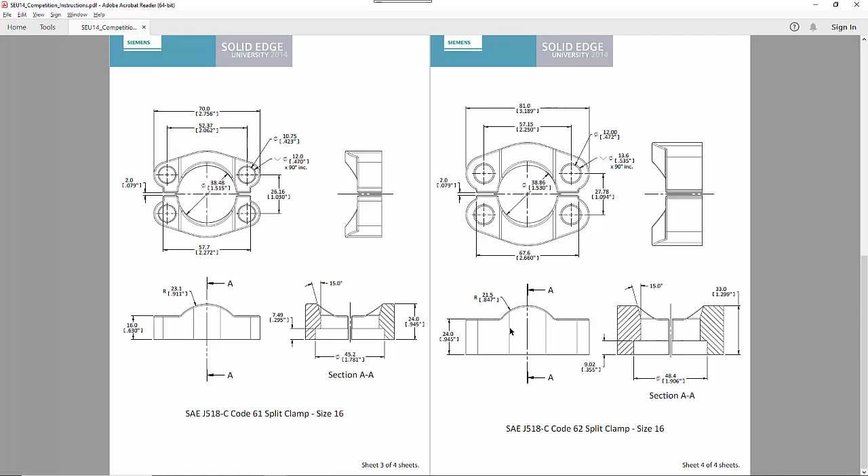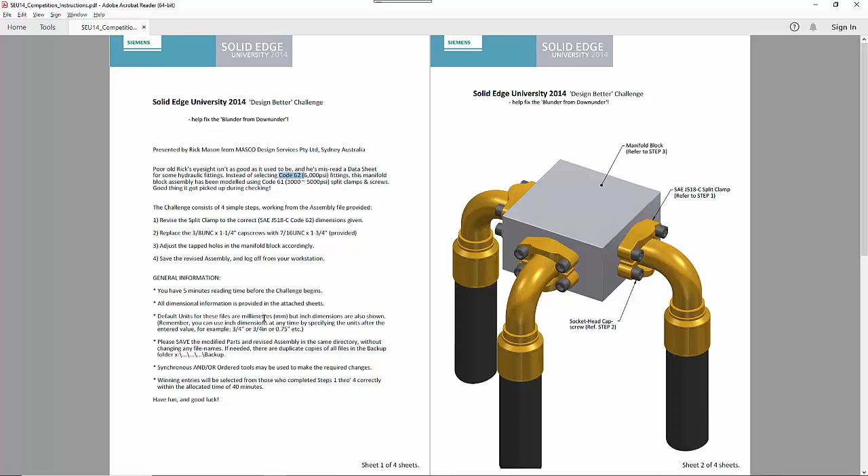So we can use either ordered or synchronous, but we'll need to work through and work out what is the best option. The assembly is made up of a number of components. We need to modify the manifold block and the split flange, and then replace the cap screws. So we'll start by going into the split flange. We'll do this from the assembly.

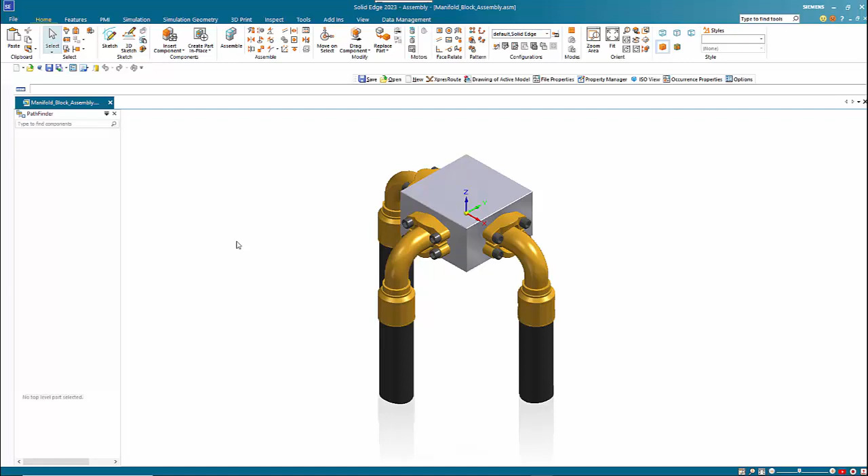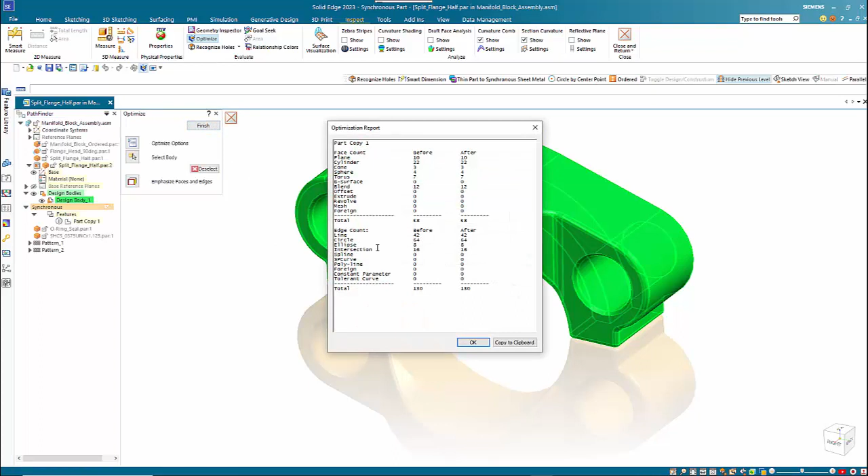I'm going to use Control Q to hide the rest of the assembly, and we'll see that we've got a part copy in here. So this is an imported model, most likely, but it's got a warning on here, so we'll go to Inspect and hit Optimize just to clean up and make sure that there's no duplicate information.

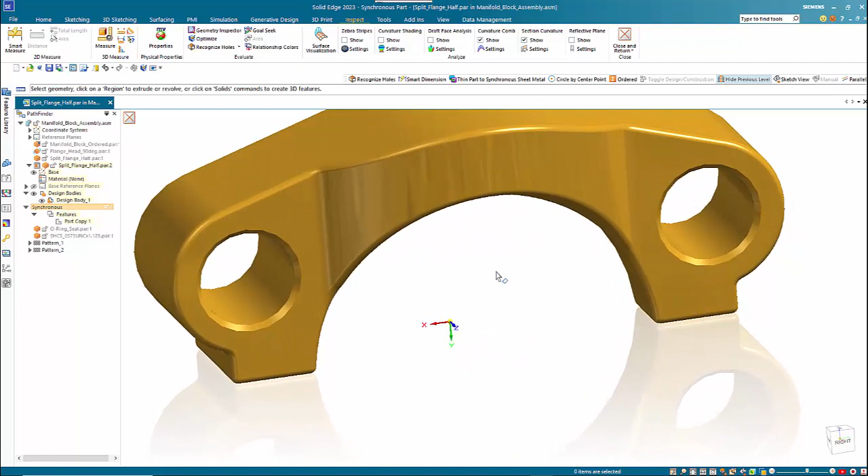Another thing that I can see from here is that we've got some complex areas coming in here, and these rounds are just going to cause problems. If I was modeling from scratch, I would put these on the ordered side of the modeling. So to start off with, I'm going to remove them. Shift and Space takes me into the selection manager, and then I can go equal radius and it'll pick up all of those at the same time. Hit the space bar to come out of that, and then I can just hit the delete key.

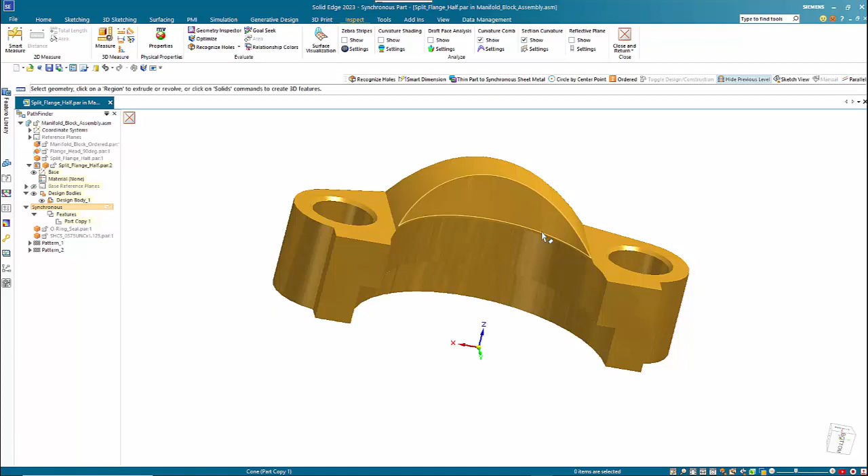And we've also got a couple of 2mm rounds on here and one in here. So just because of where it sits, I'm just going to remove those. I've also got a hole in here, so let's just go back and do a hole recognition. Fix it up, okay. I'll come back and change that later. So now let's look at some of the dimensions on this model, because I'll use those dimensions to edit the model later.

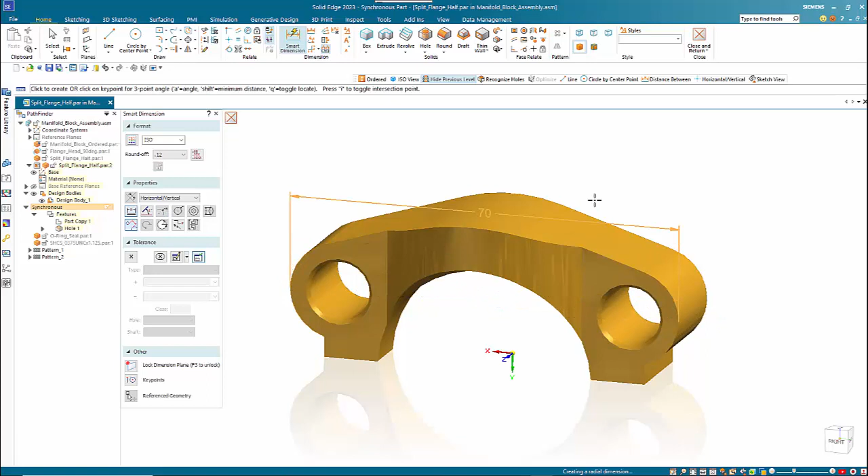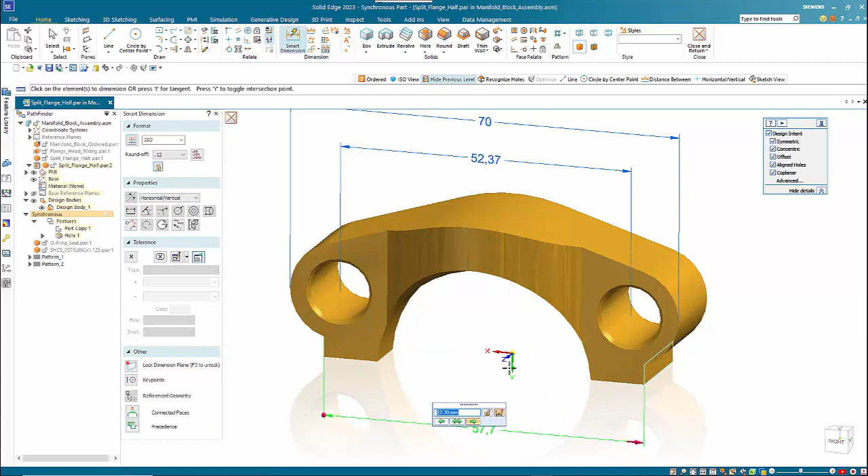So we want to go tangent to get the outside edges on here to get the overall width. Then if I go back to Smart Dimension, that turns off the tangency, and I can then go hole to hole to give a distance here, and I also want a distance on that area there, and then we'll have a height from the coordinate system on there.

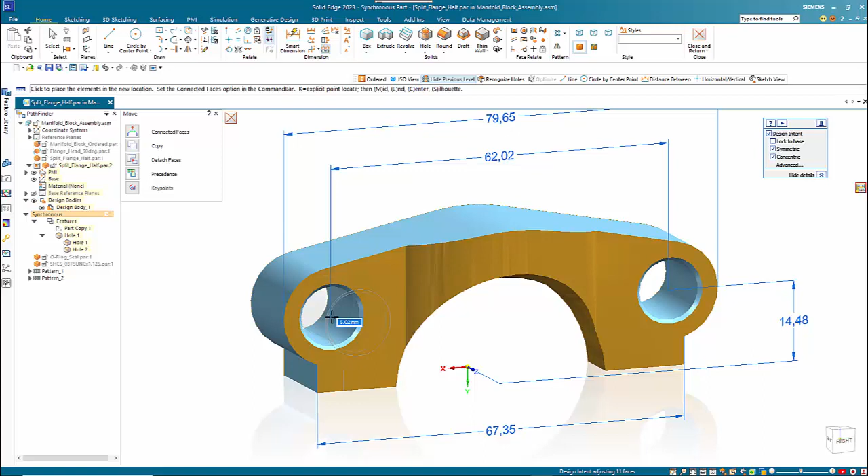So you can see what our sizes are, and by picking up on here and here, just holding the Control key down to select that extra face, design intent is on. If I pick on the plane of the steering wheel, it allows me to move it out and up. So I want to get roughly where we want it to be. I can then escape out of there, and we can edit these dimensions.

So this one wants to be 81, and I'm going to lock this one because when I change the hole, that's likely to change. Then if I add in the change on this, 67.6, we can just lock that in. And then this one here is going to change. If I go down into the text box, you can see that it's changing it. If we go down too far, we're going to lose our dimension at the bottom there because the height here is wrong.

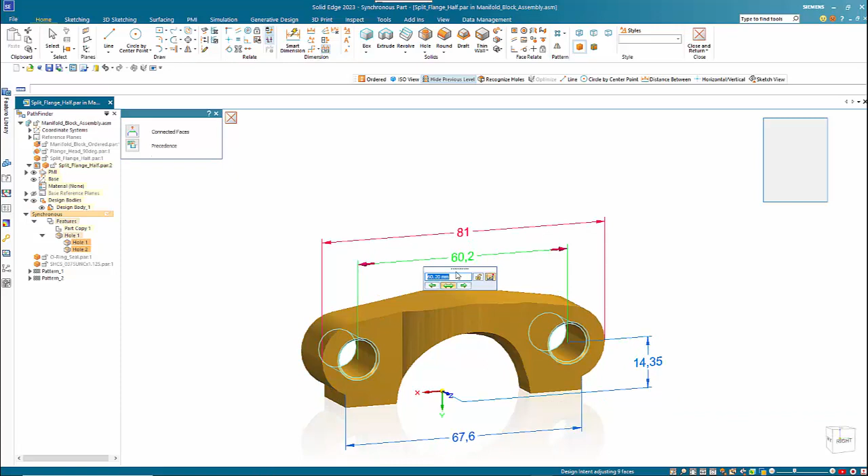So I'm just going to raise that one up a little bit just to give me my ability to edit this one. So this one wants to be 57.15 and this one is 13.89.

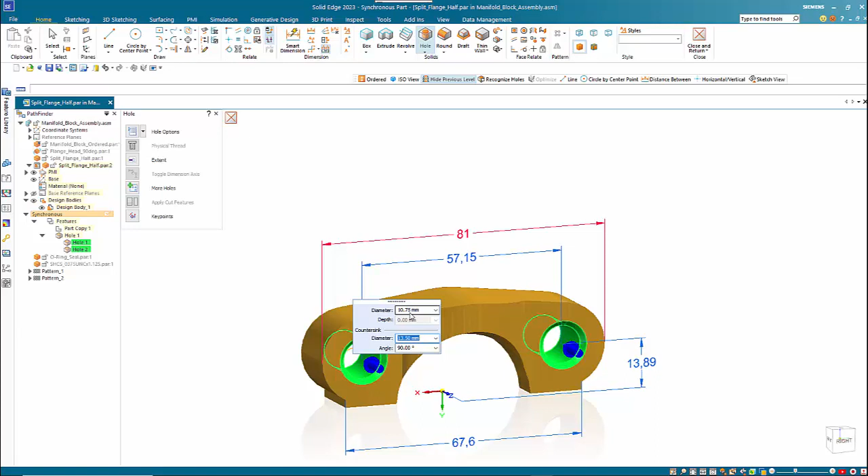So that gives me my changes in that orientation. I can also go over to the hole. You can see that it's a 10.75. So this one here wants to be 13.5 and this one here wants to be 12 mil. So we'll adjust that in.

Then we want to maybe look at some of the heights. So start by changing this value here, 19.84, and then I can add in some extra dimensions. So smart dimension for this height here, making sure that we adjust downwards. So we'll change the arrow direction. You can see the blue face highlighting, so that wants to be 9.

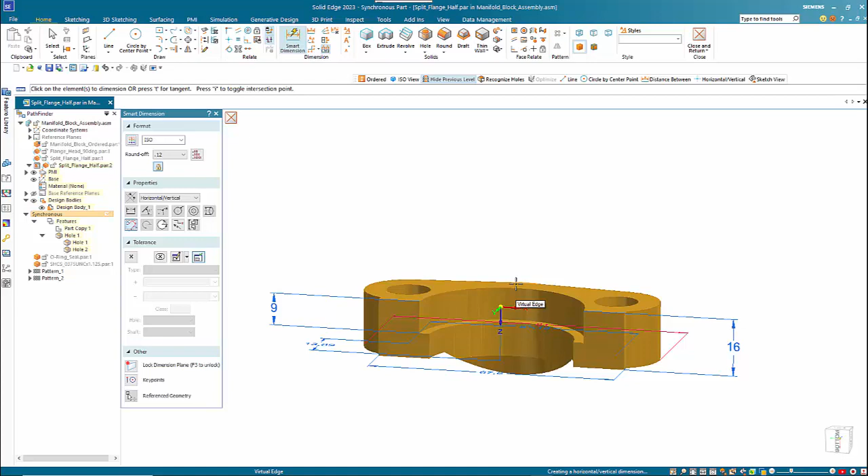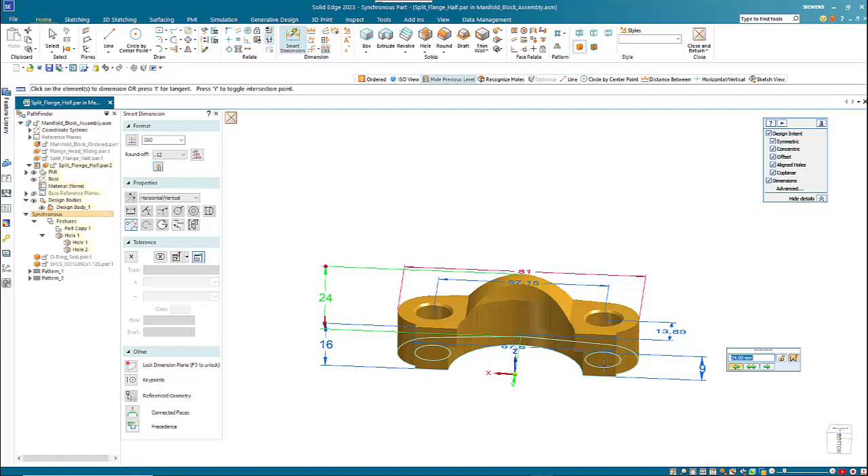Then we can add in a dimension between here and here, and again we'll go back to smart dimension and change it to tangent, and we want to go from here to here. And you can see that height. So where we want to be is we want to adjust the overall height of it. This value here wants to be 24 and 33.

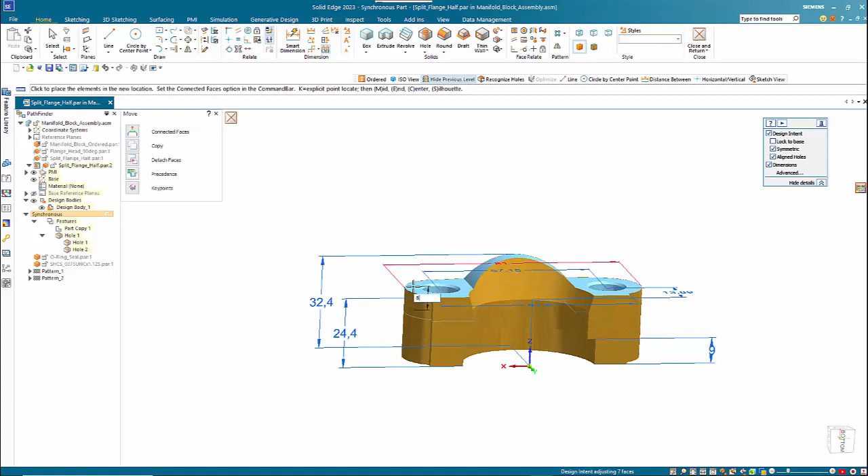I'm just going to exit out of there. I want to select the top face here, hold the control key down and select this one as well. This one gets managed through the coplanar relationship. So we just need to move this one up 8 mil. And then if I hit the escape key, I can then adjust this one up to be 33 mil.

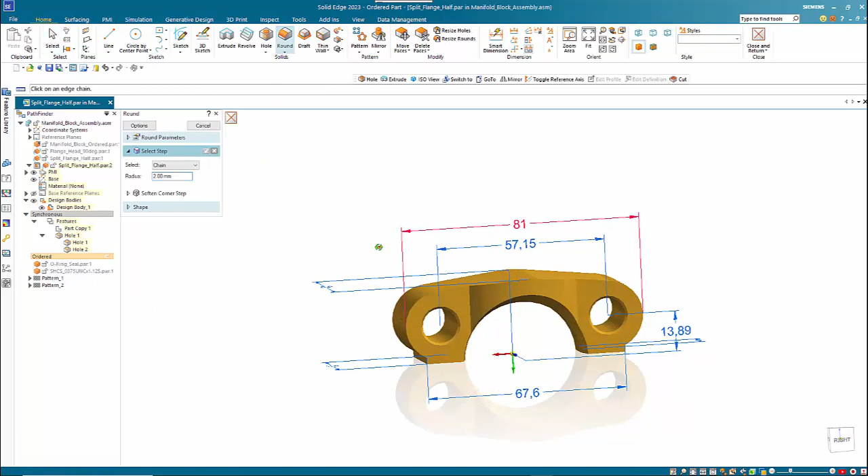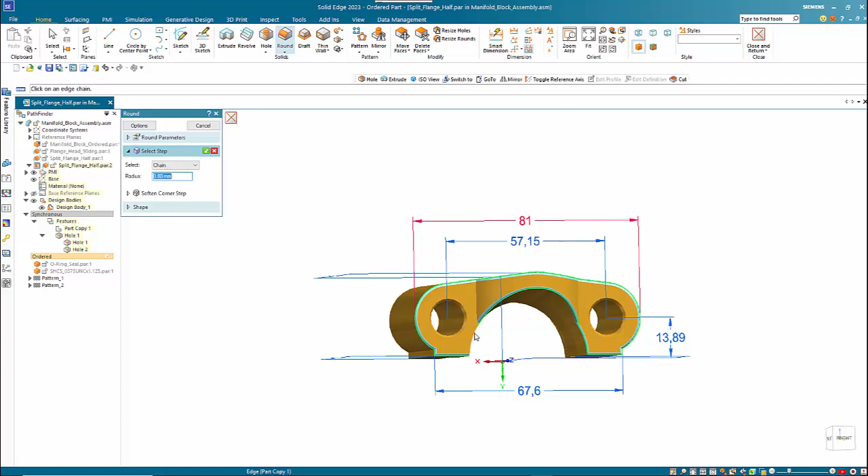So from here, we want to then reapply the rounds. So if we go back, transition to ordered, and go into the round command, we can then select these edges. This one would be 0.8. I hit the tab key, that allows me to stay within the command, and I can go around and pick up all the relevant edges. And then we want the 2 edges down the side here. Right mouse click to accept, preview and finish.

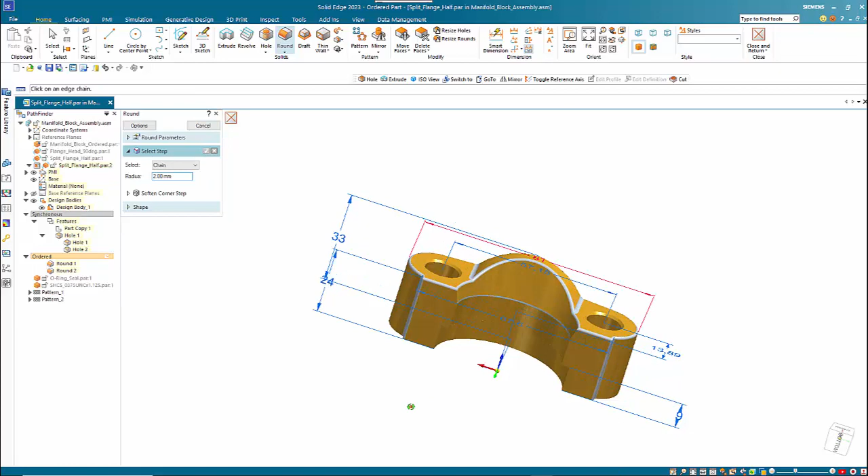And then we've got 2 more rounds to add and 1 more in here. This wants to be 2. Right mouse click to accept, preview and finish. And that completes that change to that model.

Step 2 is to replace the cap screws. So that's just a simple replace operation. And we want it onto the 7/16, and you'll see that that changes and the pattern changes. So all good on that.

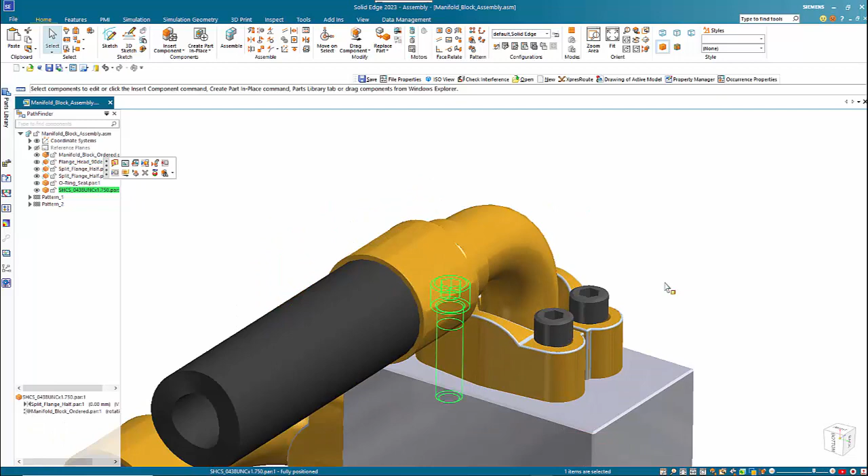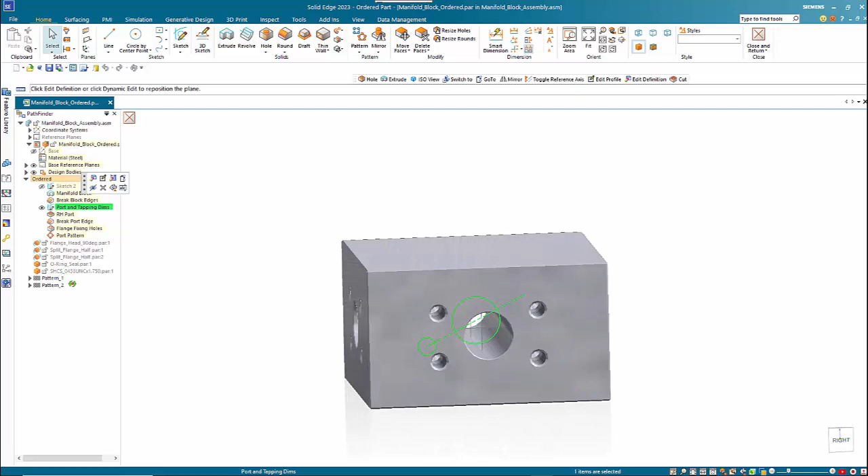So the final stage is to modify the block here. Now this one has been done in ordered, so it's a little bit more confusing. Notice on here there's a sketch that's been hidden, and that's got the position of the holes on it. So if we edit the profile on that, you can see that we've got central hole, then dimensions to the hole positions. So we can just adjust that,

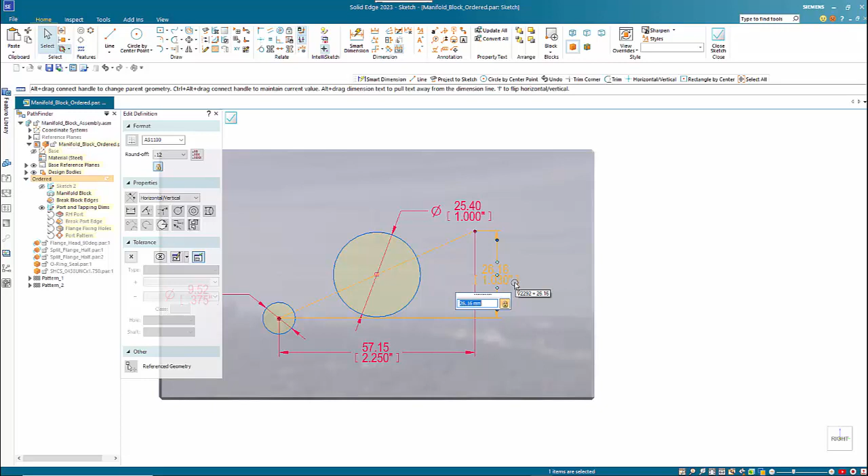and height wise this one wants to be 27.78. Now we just need to make sure that that's centralized. Looks as though it should be. So we'll accept that change in the sketch, and that will adjust the hole positions.

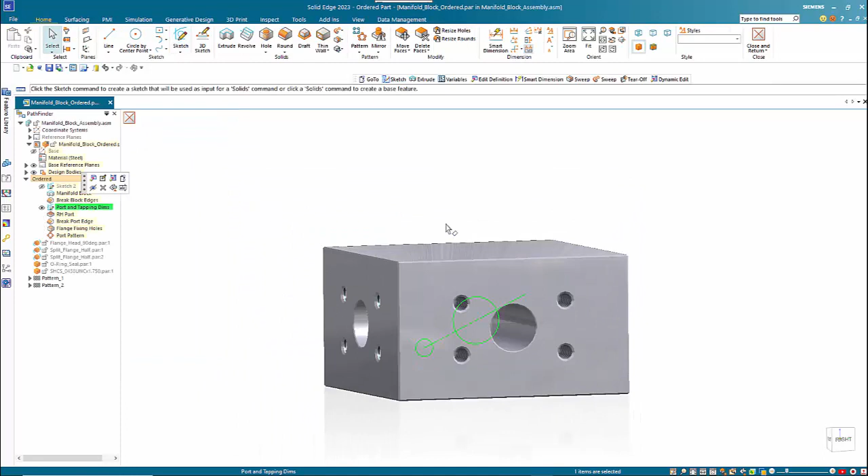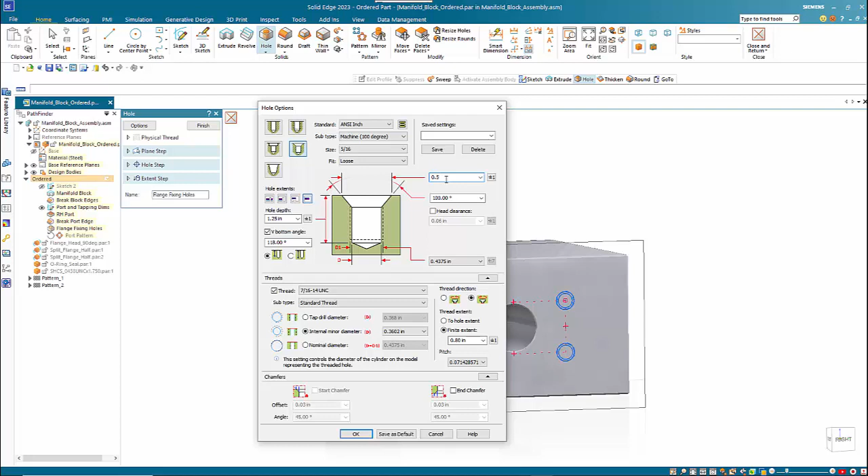Then we have the flange fixing hole. So if we go and edit definition on there, go into options, this needs to be 7/16. Just change the type to ANSI inch, and this wants to be 7/16 UNC, and we'll make that about half an inch, and go OK, and you'll see that the change is applied.

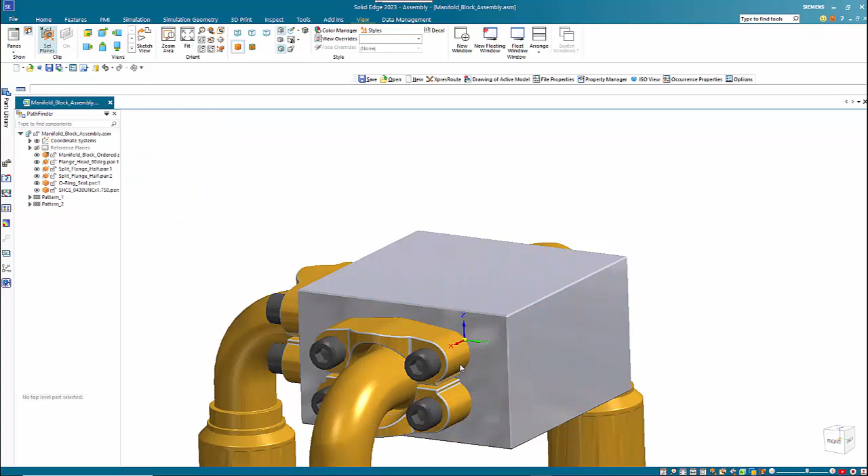So we can go finish and close and return, and we should see that now all matches. So for example, we could go and just check that all aligns up, and you'll see that we've got the holes aligning, the bolts aligning okay. So that completes this edit.